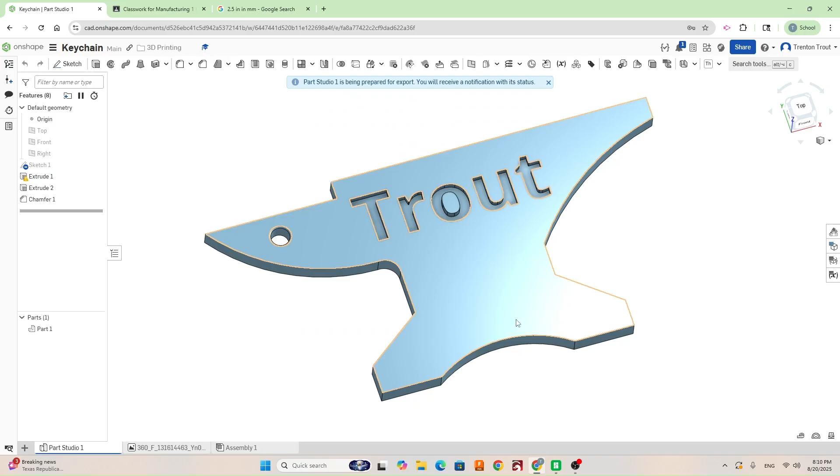I'm in Onshape right now, and I'm going to export this as an STL. Then I'm going to hop over to Bambu here, and make sure you're in the Prepare tab, with Bambu Lab A1 Mini selected in the top left, as well as Textured PEI plate.

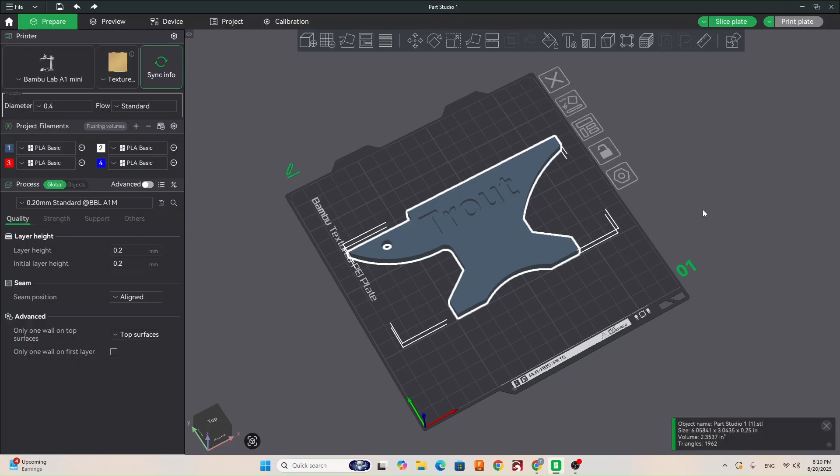Then we can go to Add Part, grab our part and bring it in. Now the first thing you're going to do is make sure that this is scaled properly. For our keychain, we know it's going to be 2.5 inches square, or roughly 2.5 inches. Yours can vary a little bit.

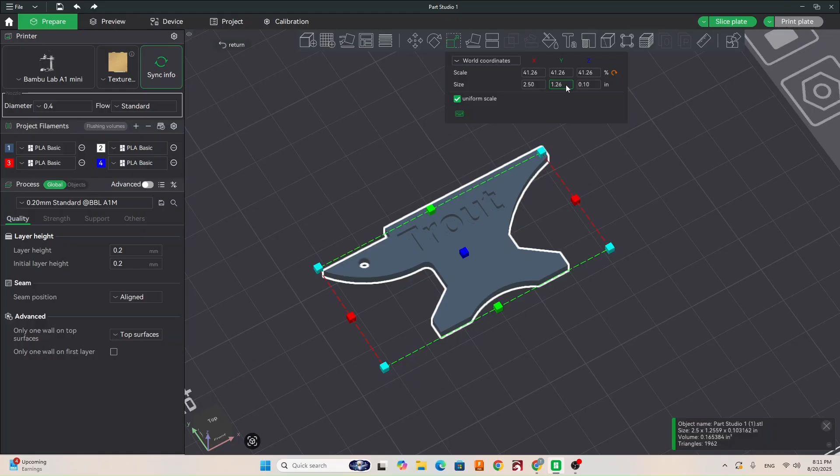So you can see we're at 6 inches for the width. If we keep uniform scale checked and type in 2.5, that's going to bring everything down to scale here. You can play with it a little bit, like going to 2, and if you're a little bit over the 2.5, that's not a problem at all.

Once you have it scaled to what you'd like, we can start messing with our colors. Over here under Project Filaments, you're going to have your different colors. You can add more with the plus sign and remove some with the minus sign. We can do up to 4 different colors on our machines, so I'm going to go ahead and add 4.

You're going to want to make sure that these are on PLA Basic, because that's the filament we're going to be using. If you get into some multi-materials, you can go in here and change the different materials - that's just the type of filament that we're using to print.

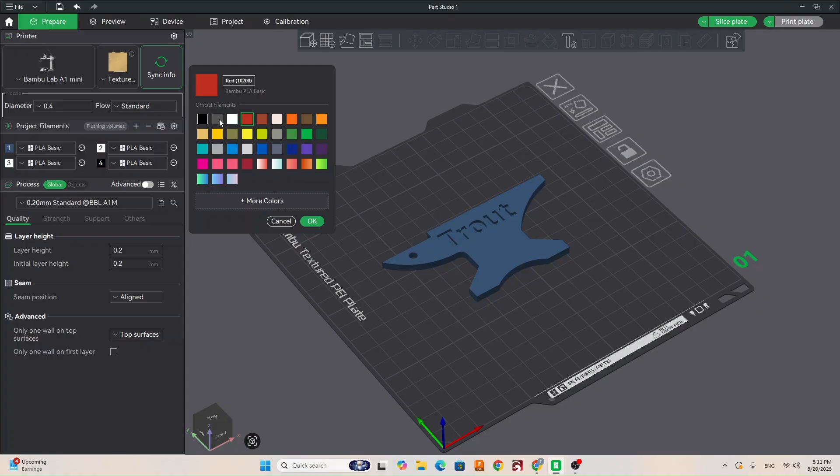Then we're going to go ahead and change our colors. If you click on the number here, you can change it to whatever's closest to what you want to print with. Feel free to go look in the print room to see what color filaments we have. So I'm just going to go through - blue, white, black, and maybe let's make this a red. Now we have our 4 different colors that we're going to use.

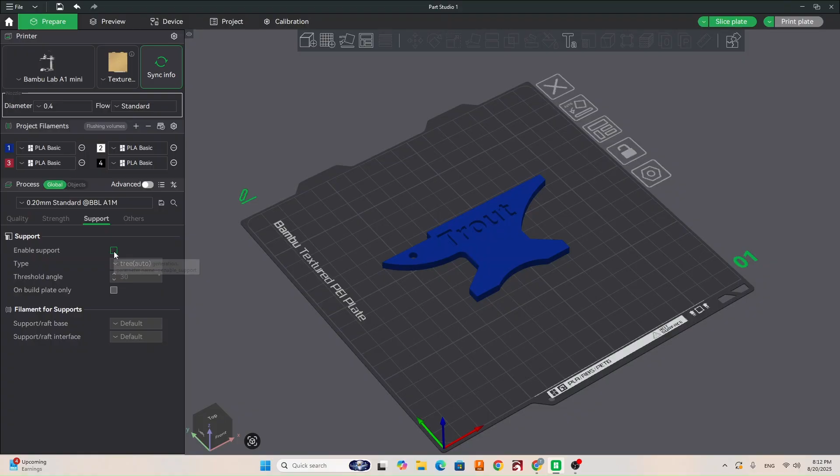You don't have to use 4, you can use up to 4. The more colors you use, the longer it's going to take to print because it has to switch between those colors. For print settings, we can just keep it on standard, and if yours for some reason needs support, remember to enable that. We shouldn't need it for this design though.

Now we need to select which colors we want on which faces. First I'm going to click on my object, then this paint bucket tool up here. Right now it's on connected same color - we need it on edge detection, and make sure you're on the fill icon here.

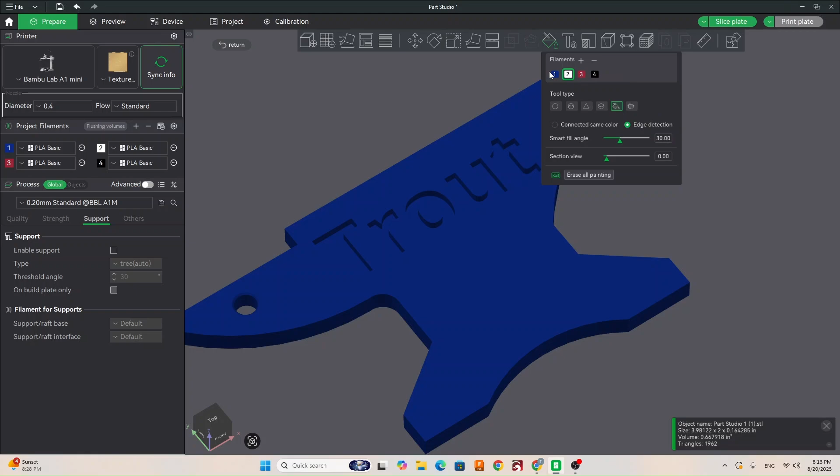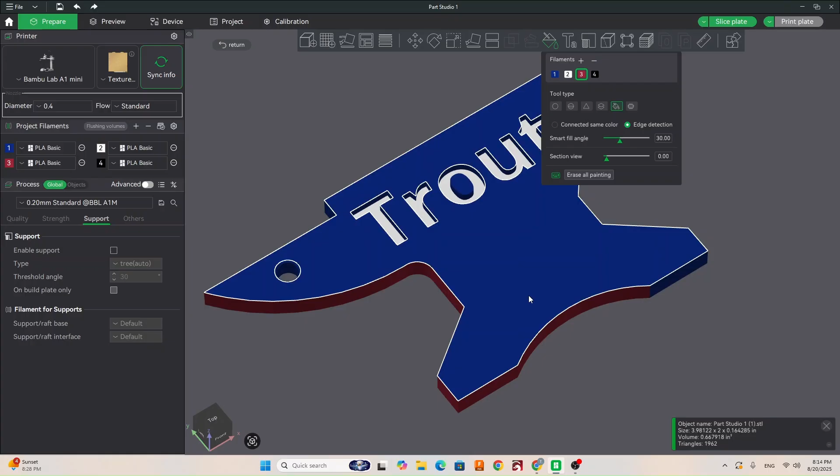Then you can switch between your different colors up here, and you should be able to select the actual face. You can see now I can select this face to change the color that I want. Then maybe we want the edges to be red, so we can go through and select all the edges. Like I said, the more colors you have, the longer it's going to take, so keep that in mind as you're selecting the colors.

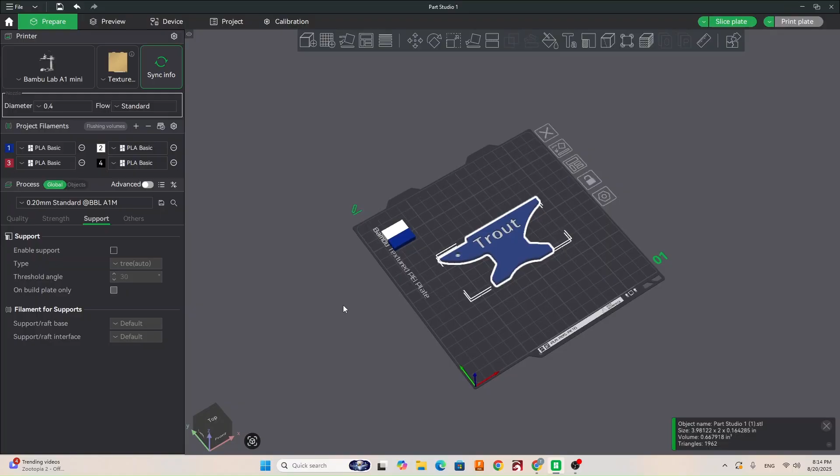If you mess up and want to restart your recoloring, you can just hit Erase All Painting, and that'll allow you to select all the different colors again. Once you're happy with it, click out on the paint bucket tool. Then we're going to go into the Others tab and get rid of that Prime Tower - we don't really need it for what we're doing, and it's just going to be wasted filament and wasted time.

Now that I'm happy with that, I can go up here and click Slice Plate. It'll give me my model printing time and how much filament I've used of each color. Then we can go down, Export Plate Sliced File, click that, and export it to our micro SD card.

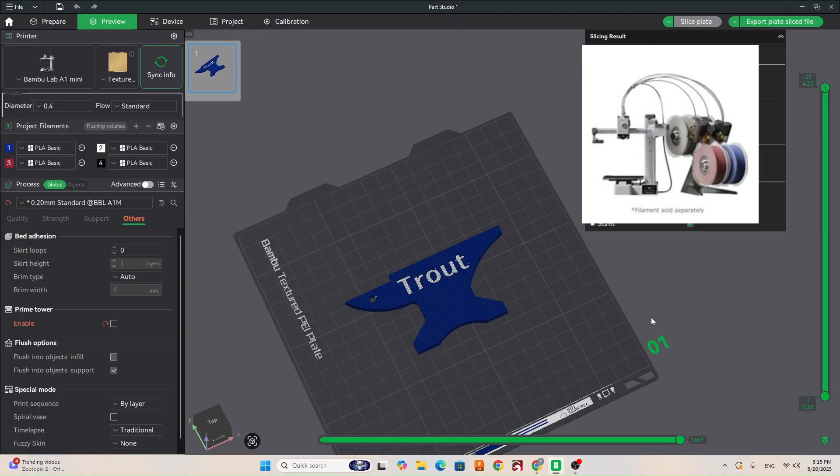Now that you have your file, you're going to take it back to the print room, and you're going to want to use one of the A1 minis with the AMS system - that's the 4 spool holder on the right side of the machine. We should have at least 3 of those, so you have to pick from one of those, and you'll load up all your colors on that machine.